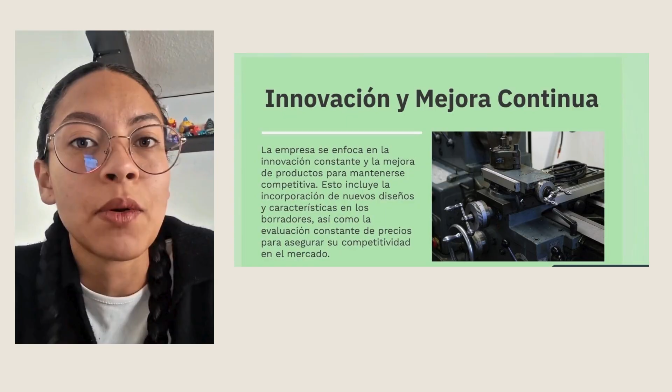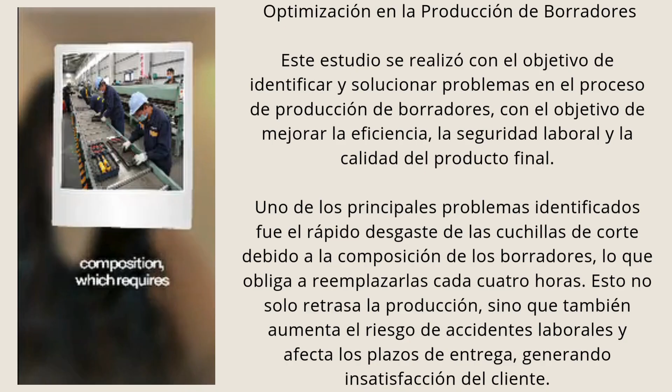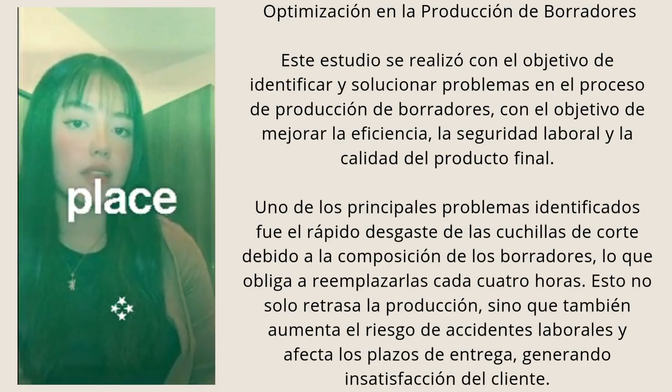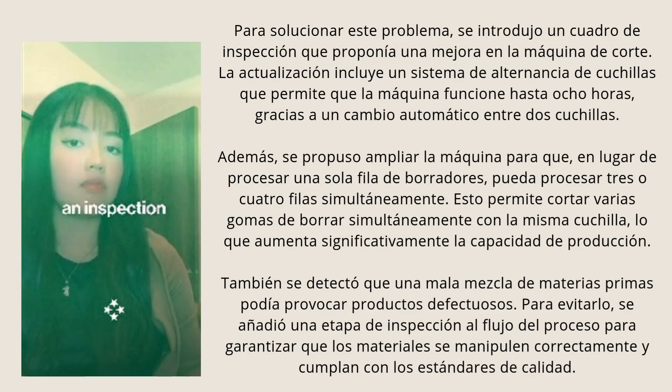One of the main problems identified was the rapid wear of the cutting blades due to the eraser composition, which requires replacing them every four hours. This not only delays production but also increases the risks of workplace accidents and affects delivery times, leading to customer dissatisfaction. To address these issues, an inspection chart was introduced, proposing an improvement to the cutting machine.

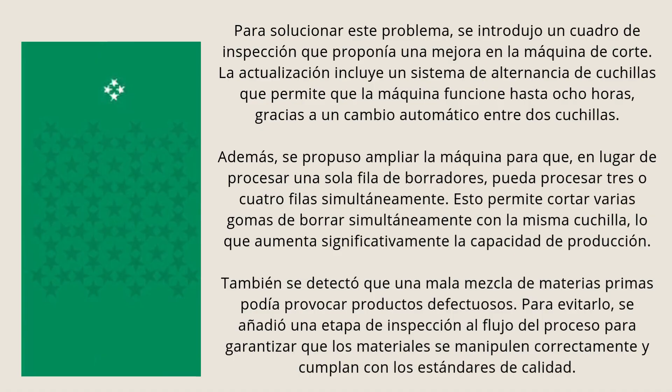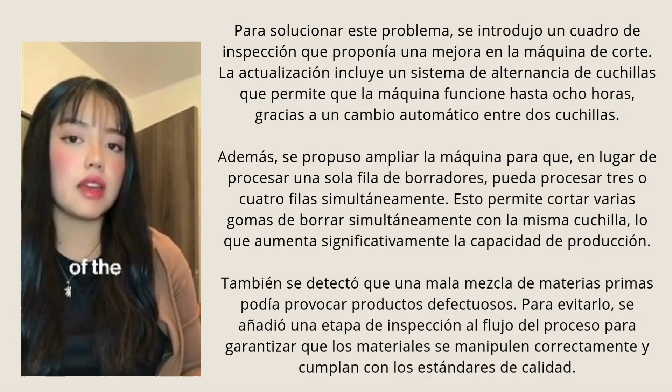The upgrade includes a blade alternation system that allows the machine to operate for up to 8 hours, thanks to an automatic switch between two blades. Additionally, it was proposed to expand the machine so that instead of processing a single row of erasers, it can handle 3 or 4 rows simultaneously. This allows multiple erasers to be cut at the same time using the same blade, significantly increasing production capacity.

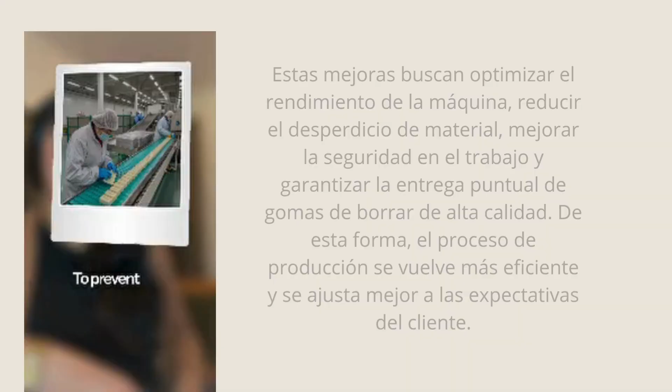It was also found that poor mixing of raw materials could lead to defective products. To prevent this, an inspection stage was added to the process flow to ensure that materials are handled correctly and meet quality standards. This improvement aims to optimize machine performance, reduce material waste, improve workplace safety, and ensure timely delivery of high quality erasers. In doing so, the production process becomes more efficient and better aligned with customer expectations.

First, the general objectives: clear, consistent, and realistic objectives to express the desired results of the project. Next, the specific objectives, which are stages defined to achieve the general objectives. It's essential to consider expected results in each statement and goal, and to determine the indicators and procedures to measure them.

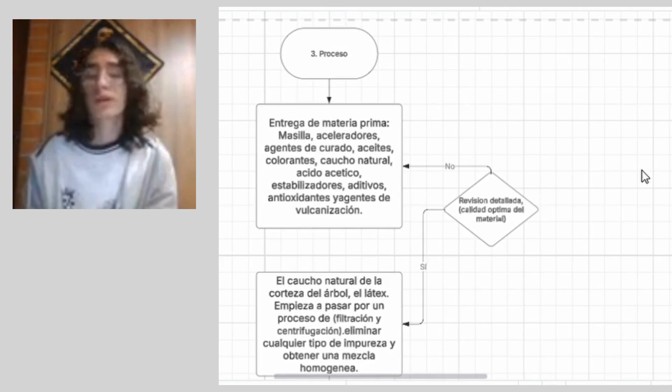For example, when the materials arrived at the company, we check if they are all right, if they are what we asked for. If they are okay, we keep them and start with the process. If not, we return them to the provider so they can give us good material. That's the first solution we did, to add some inspections.

And the other cause was the machinery, especially the blades. So the first option we had in mind was to cut them into the final shape, and then mix it with every part.

The thing with this one was that if we do it, it would be more probable for the blue part to completely mix with the pink one. So this wouldn't be good, because that's not what we want.

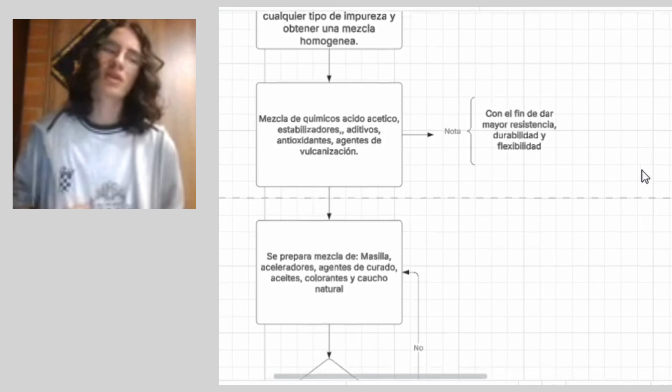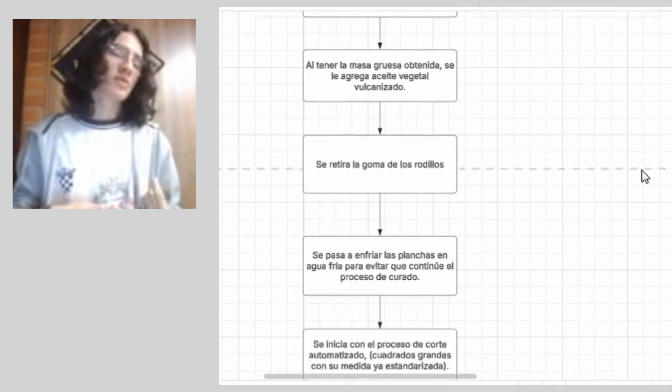And the other possible solution was to just enlarge the machine, so it would cut more in the same time. The thing with this is that we would have to enlarge the other machines too, which would be more money, more people, and we wouldn't be saving money. We'd be spending more and producing the same, so it's not affordable. It's not a good option.

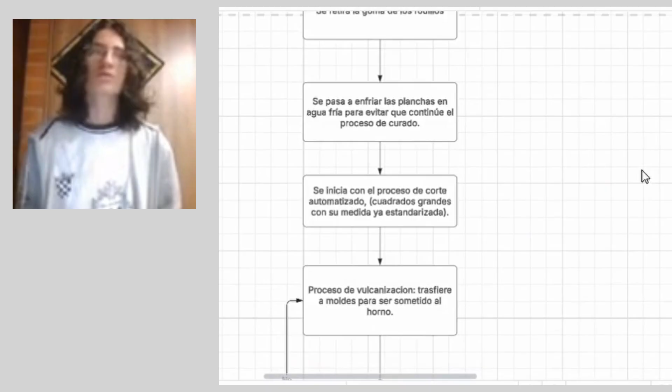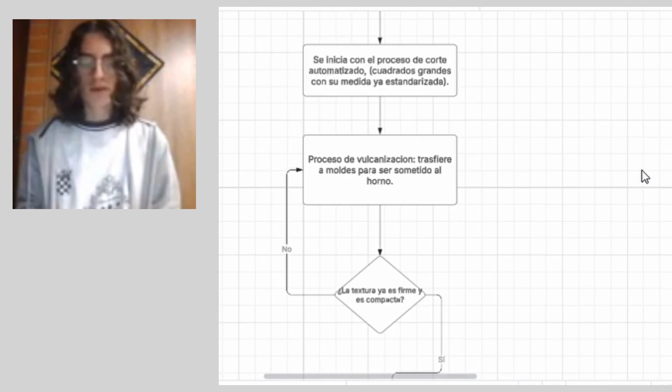This is the final option we found that we thought was the best one: to have a self-changing machine which works the following way. So you have two blades, right? One is cutting and the other one is just there.

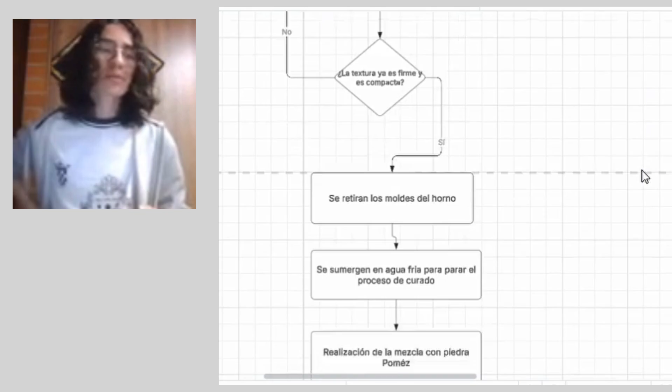We program it so every 4 hours they change automatically, and every 8 hours we change them manually. So we will save 4 hours in changing.

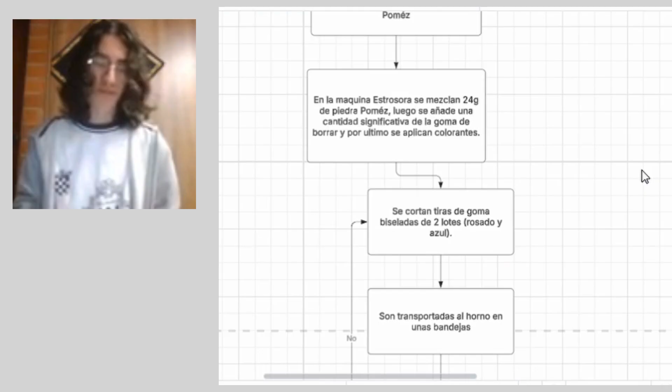So we will be saving waste in blades, money in blades, and in the salary of the person changing it. That person could be doing another job instead, and it will also help the environment because we will be throwing away less waste in blades. So that's it, that's the solutions we found to this problem.

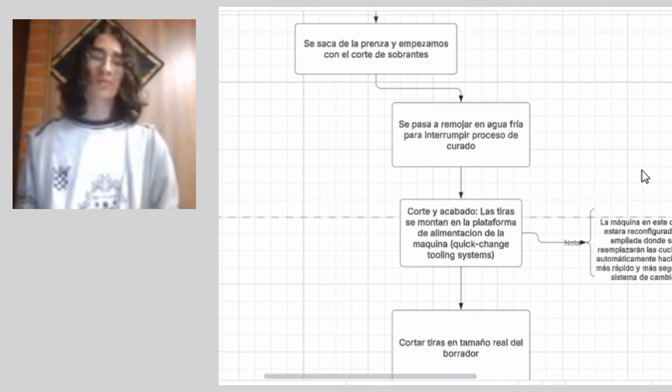The diagram basically stayed the same, and we just added more inspections because we found that one of the causes of the dissatisfaction was the result of the product, because it wasn't clean.

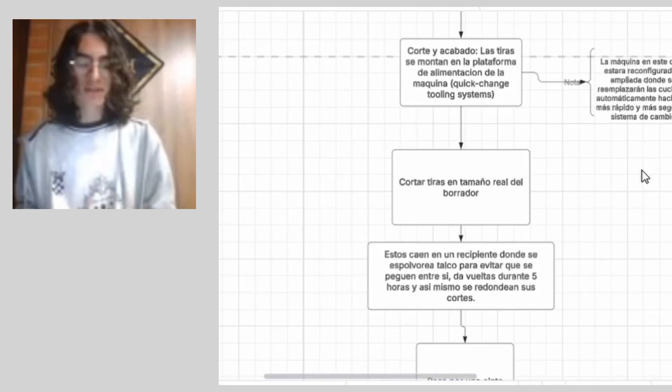As the machine loses sharpness, the cutting of the gum is not clean, so it's not what we want. And it doesn't look good for the customers, so they don't want to buy it. They return it to the store, and we are losing money. So we inspect it to see if the most important parts are going the right way, if it is clean, if everything is doing good. So that's it, and that's the solution we found.

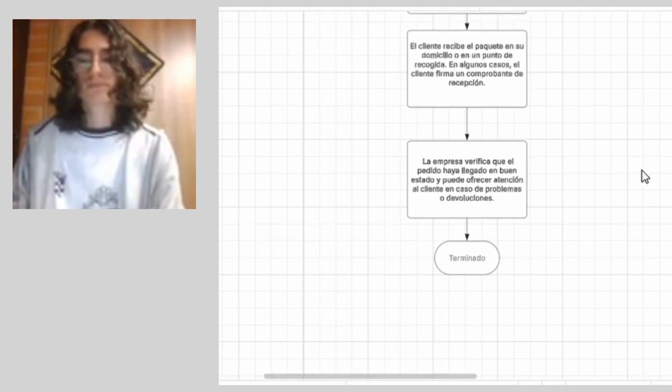Well, I'm going to talk about the final diagram. As my partners said before...